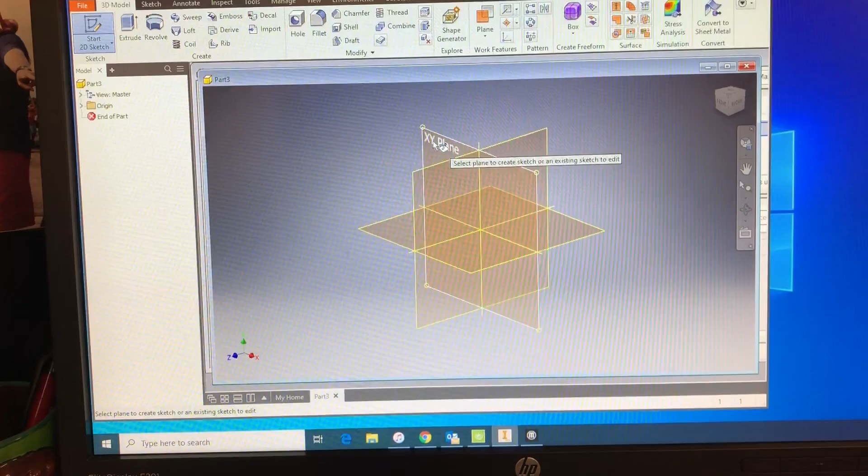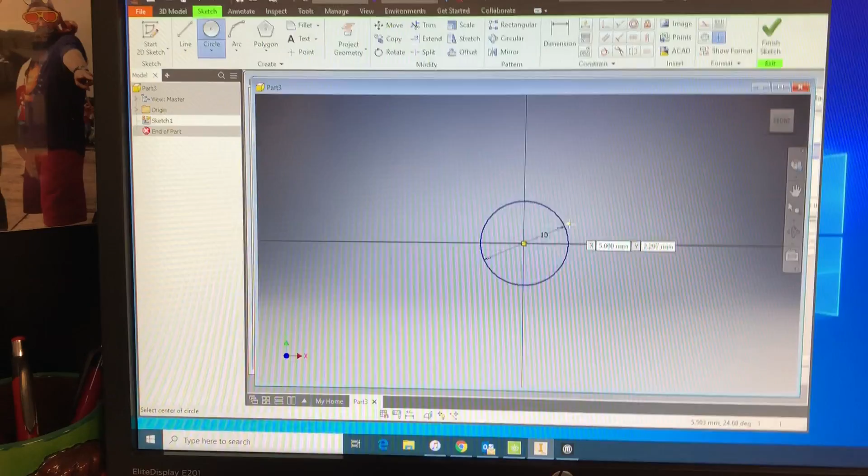Now I'm going to start with the bolt. I'm going to come in and draw my circle. The shaft for the bolt is going to be 10 millimeters in diameter. Is that pretty simple? Yes.

Now the next thing we're going to do is extrude that 20 millimeters. So right here, we're going to extrude that 20 millimeters. So I now have the shaft for my bolt. Does everybody see that?

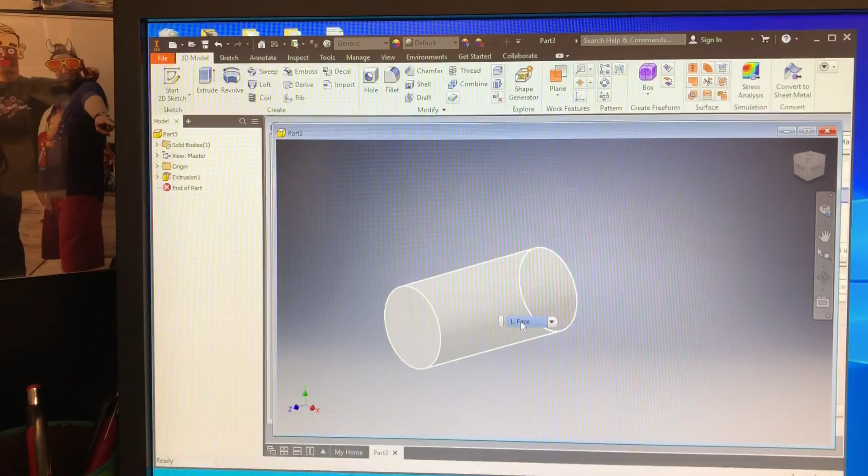Now what I want to do is on the back side here, I want to start another sketch, and I'm going to make the polygon 6-sided. I'm going to start in the center and bring this out. Does everybody see that?

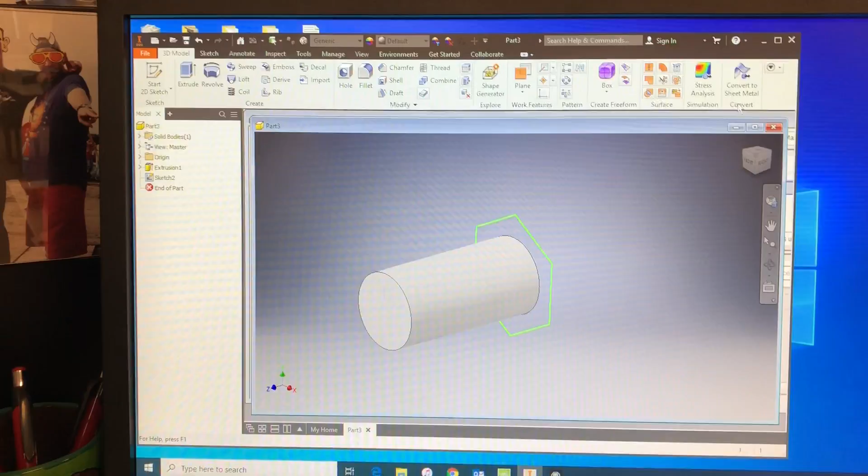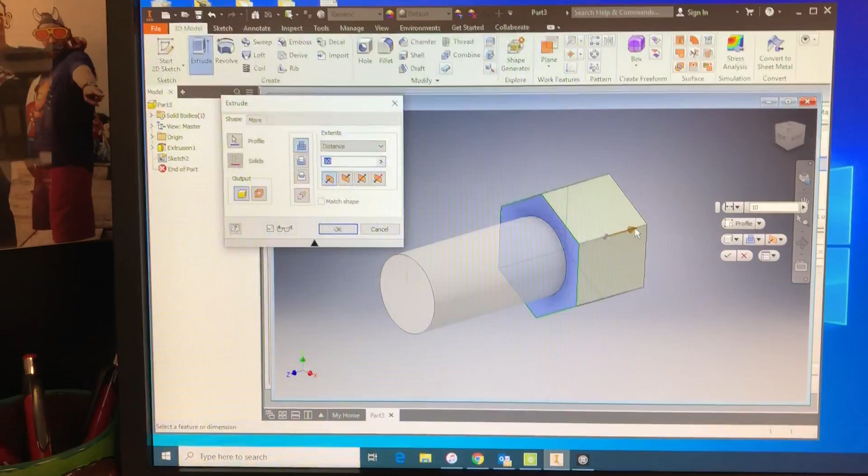Now what I want to do is extrude that. The extrusion is going to be 10 millimeters. Now the direction of the extrusion—you see what's happening here? You want to make sure that your direction is offset the opposite way here. And you can click OK, and you now have your bolt.

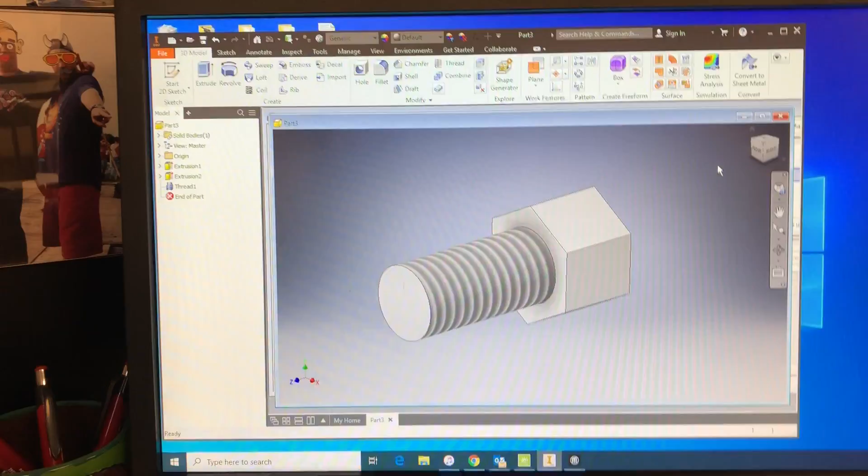Now this piece right here needs to be threaded. So you have your bolt. Does everybody see that? Now the next thing I want to do is put my initials on it, so I'm going to select this surface right here.

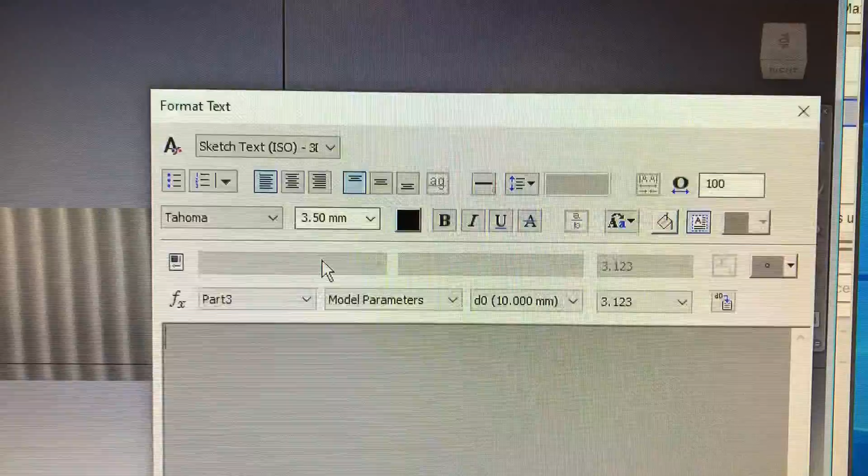See that? Underneath sketch, up here on the ribbon, you're going to find this text tool. You see the text tool there on the ribbon. You're going to select that text tool and click on that face. You're going to get your text menu pop up.

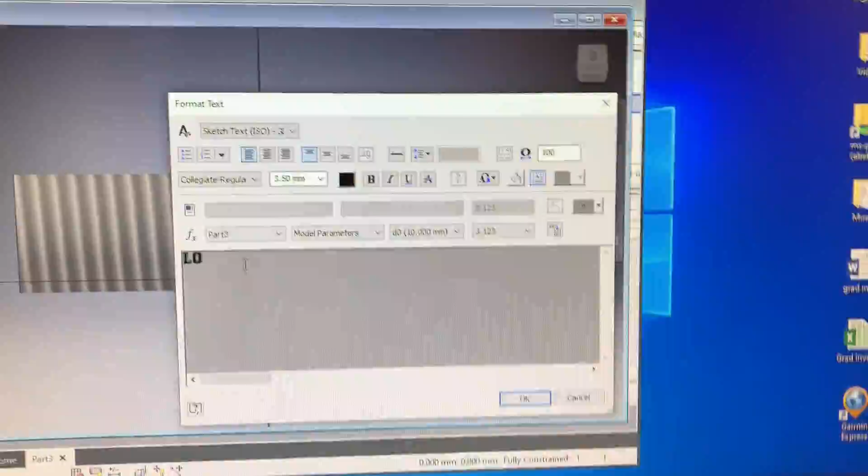You want to do sketch, select a font—I don't care what you select—and select a size. I usually run about 3.5, and I'm going to go with 2 letters of my last name there, and I'm going to hit OK.

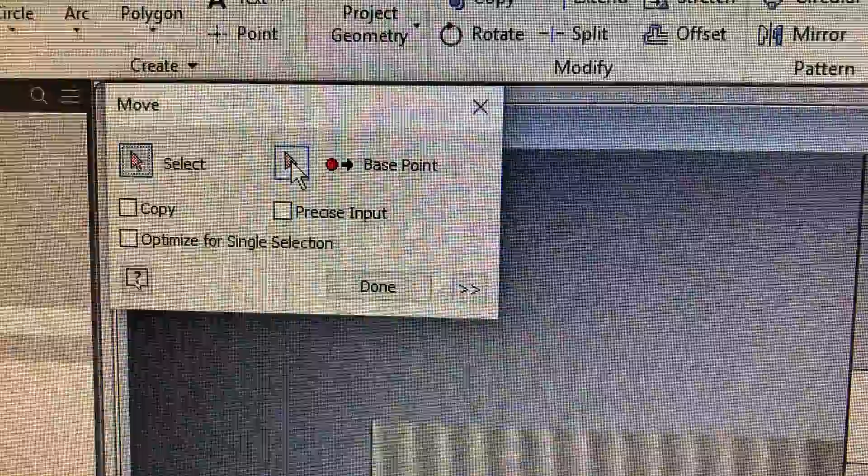Now what do you notice about the placement of those? So up top here, I can come in and go to move. You see move? That's going to allow me to reposition that text. I'm going to come over here and select base point, come down here and select that little dot, click. Well, let's see if it'll work.

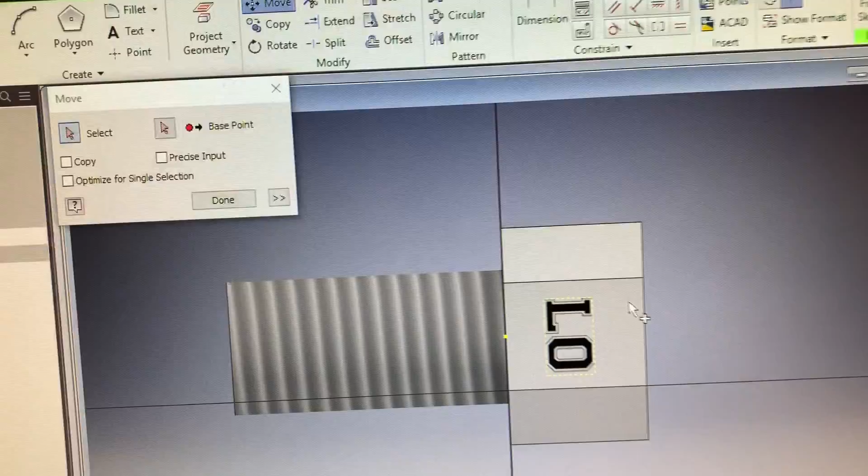This is hard doing it with this phone. Reposition the text and click. I'm now finished with that sketch. I now have my lettering on there. Does everybody see that? Now that is just flat with the surface.

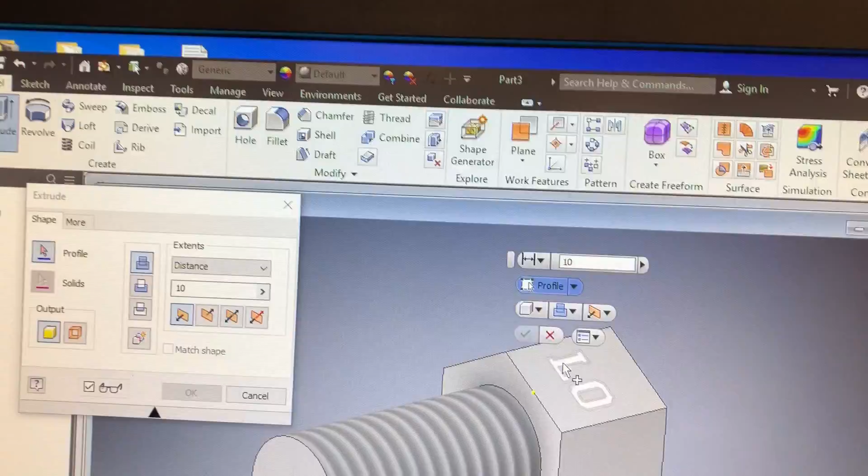Do you think that's going to show up? No. So what I need to do is come up here and extrude that text. I select extrude, grab the text. I only want it to extrude 1 millimeter—maybe 2, you can go 2 if you want, but I like to go 1. Select the OK button, and I now have that complete.

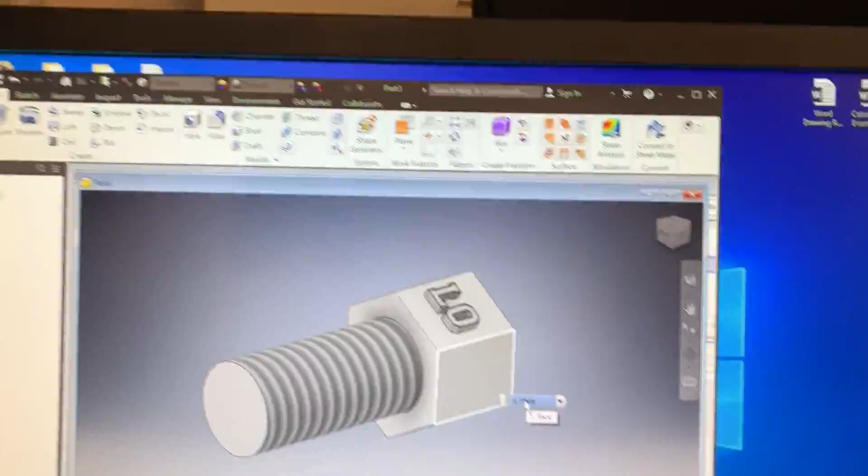I need to save this into my network folder. So we go up here to File, Save As, and I'm going to call this... and then I want to put that into my network folder. Hour 6. Okay, I now have that done, right?

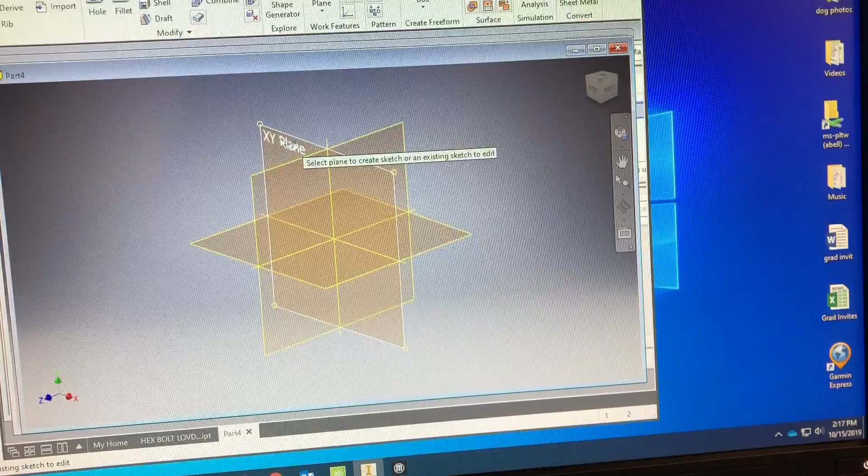Yep, is that it? Now yesterday we made a hex nut as well, right? So I'm going to go in here, File, New. Again, Metric, Standard, Create. What are we making now? XY plane—wait, another hex? Circle. He's just showing us again.

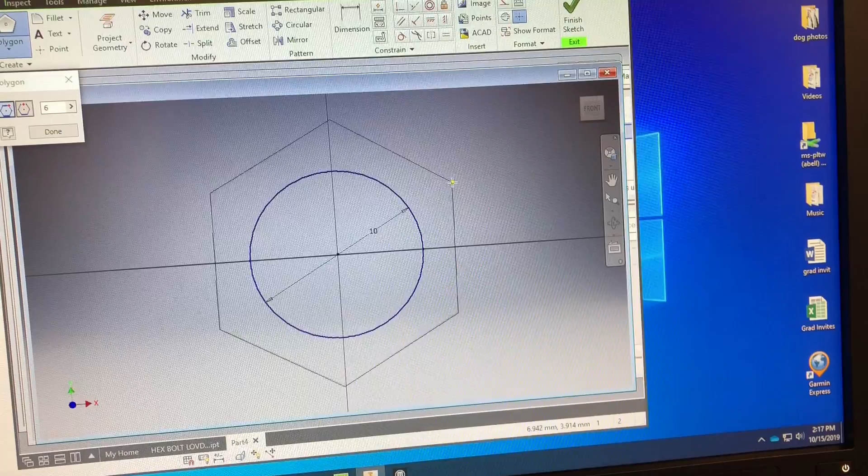Oh, I want to make this one 10 millimeters. I'm just going to launch now. I'm going to start another sketch, same plane, polygon, 6-sided, start in the center. I'm going to make that a little bigger there. Finish sketch. So I now have the makings of a hex nut, right?

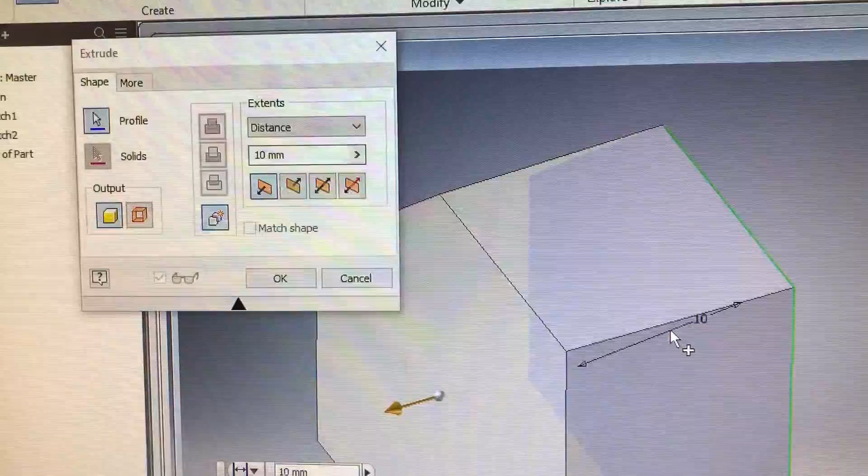Yeah, well, I'm going to extrude. Now the first part I extrude is going to be the polygon. I'm going to make sure that it is 10 millimeters for that polygon. Now the next thing I want to do is grab the circle and extrude that. I'm going to make that 10 millimeters. I now have a hole inside that I can thread.

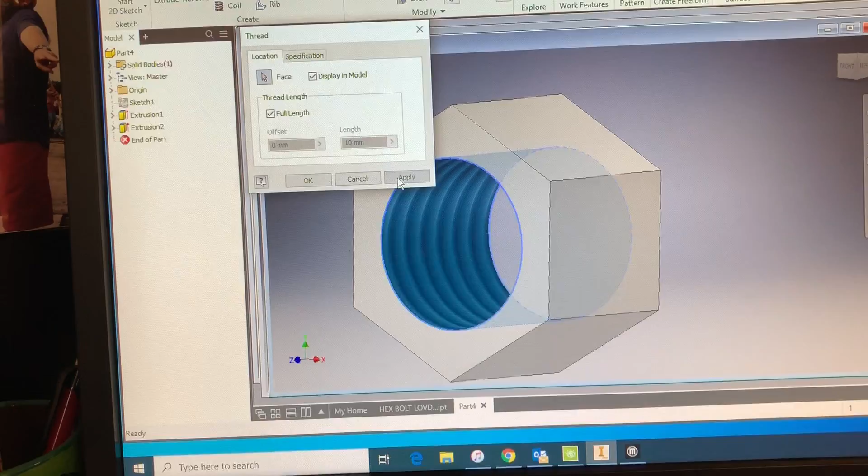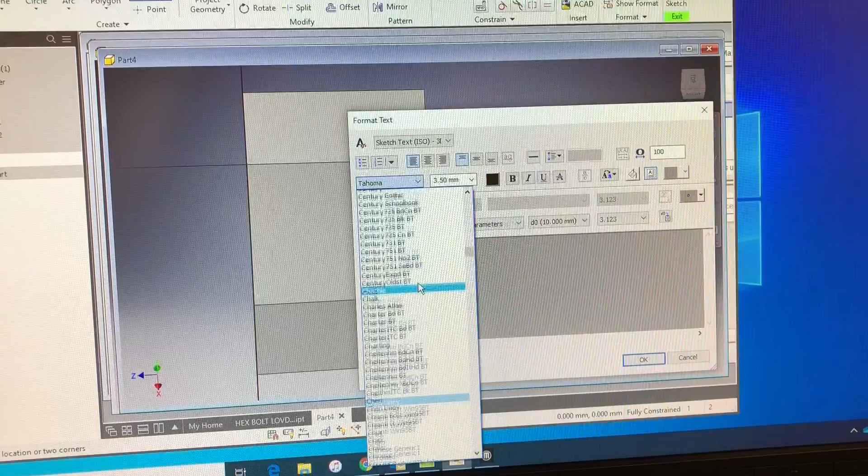Now the next thing I need to do is select this side and put text on it. I'm going to do the same thing with my text. I'm going to come down here and select the font. I'm going to use my move tool here, select base point, select that.

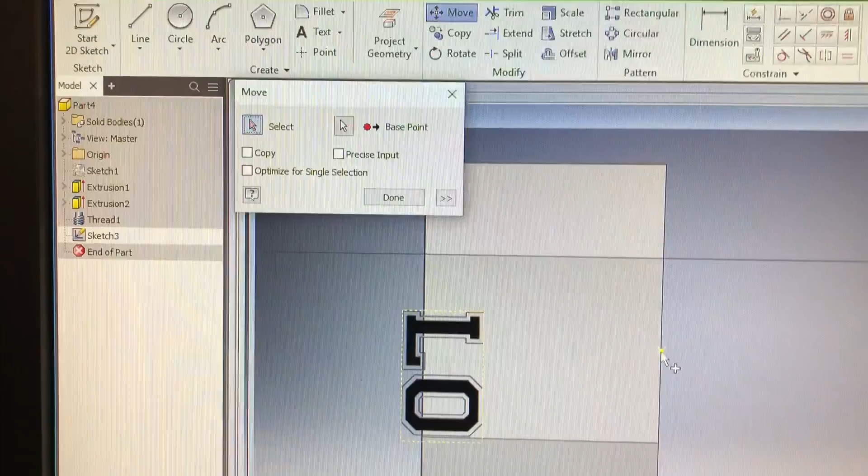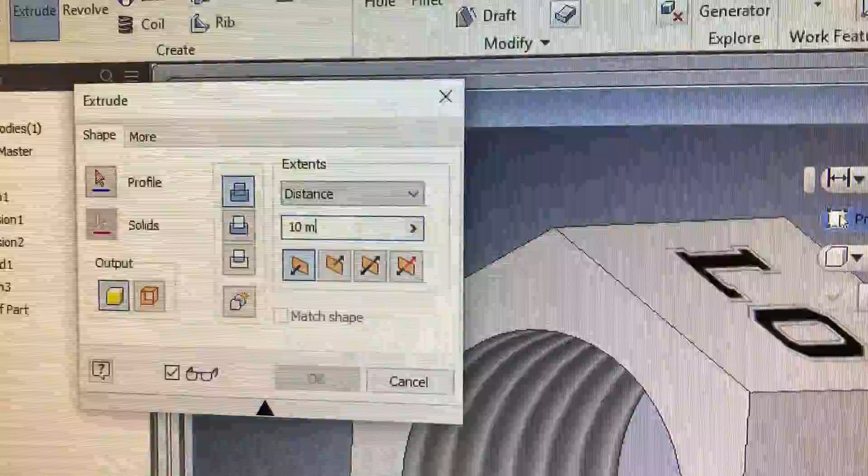Finish. Now I need to go under 3D modeling. I'm going to extrude, I want to extrude it to 1. And the direction that I extrude it, I got to select that object. Hit OK, and then I can save this. So I have that saved into my network folder. Save. Is everybody with me on this?

Yeah. Now the next thing I have to do is get it ready to print. In order to print this, I need to go under File, Export, CAD. In the window that pulls up, I need to make sure that this right here is set to STL file. I go under the options menu.

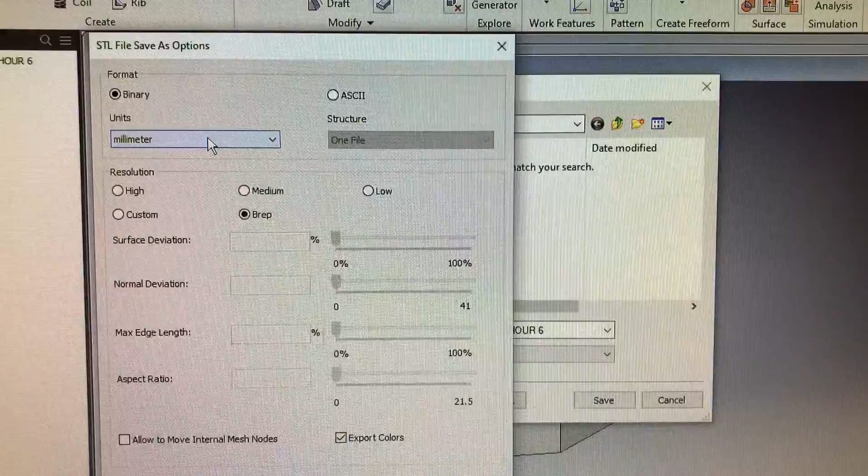I want to make sure that this is set at the same units that I did my drawing in. That's going to make sure that it's scaled properly. So right here, I put it under millimeters. That is under your options menu, so you go under options, you can set this to the exact same one you had. You hit OK, and then you save.

I'm going to do the same thing with the bolt. File, export, CAD. Make sure that this is at STL. Go under options, set this at millimeters, click OK. And then I'm going to save that into my network folder. Did everybody understand that?

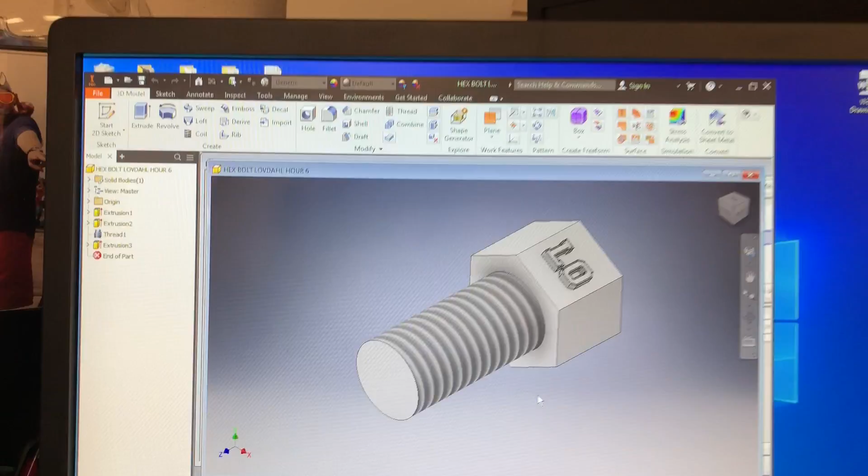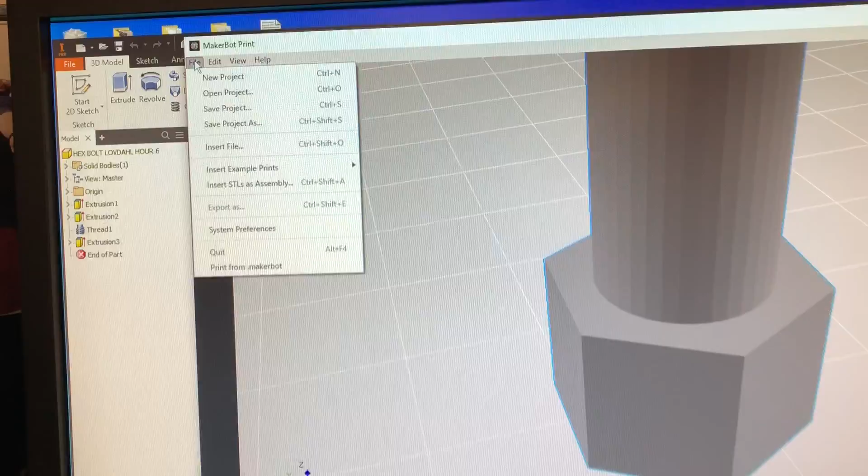Now in MakerBot, I can come in here and under File, I can insert, go into my network folder, grab that part, and it will place it onto the mat. So again, File, Insert, and it places it. Does everybody see that?